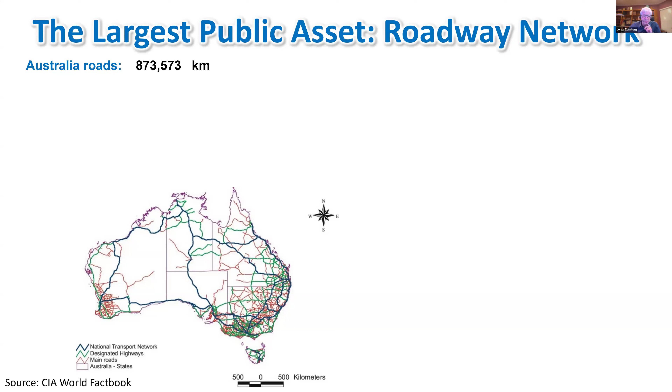As a reference, we have 873,000 kilometers of roadways in Australia. It's hard to put our head around what almost 900,000 kilometers really means. As a reference, the circumference of the Earth around the equator is only 40,000 kilometers. So if we took all the roads in Australia and wrapped them around the equator, we would go around once, twice, 3 times, 5 times, 20 times, 22 times around the equator just with the roadways in Australia. It's a lot.

And we need to build them. We need to maintain them. We need to operate them. As a reference as well, the US roadway network is over 6 million, almost 7 million kilometers. So we would need to go 170 times around the equator with US roads.

If we go to the world, and I want you to remember this number, 64 million kilometers, we would need to go 1,600 times around the equator with our roads just to have a sense of what we mean by the roadway network.

We're not going to get too much into design, but I want to tell you how geosynthetics will help designers obtain a better performance on our roadways. Just as a reference, the typical geosynthetics that we would use in roadways are going to be geotextiles, woven, non-woven geotextiles, or geogrids, uniaxial, biaxial, multi-axial, different polymers, geocells.

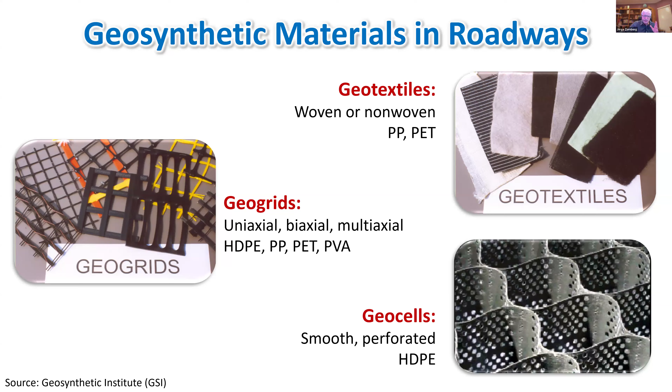Now, when it comes in this presentation, roadways is a lot of things. It's embankments, it's bridges. But in this particular presentation, I am only going to focus on the structural package of a roadway, something like this. So going from the top down, I'm going to specifically focus on flexible pavements, that is, pavements in which we do have an asphaltic layer as road at the very surface.

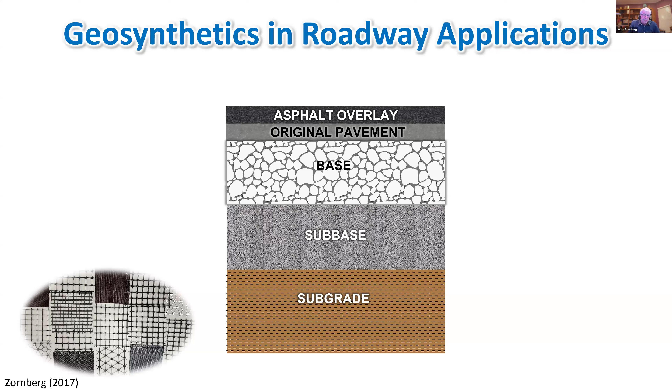So where do geosynthetics go in this structural package in the roadway? This is a complicated thing, because we can use geosynthetics in way too many forms and different types, functions, and applications. So a little bit of what I'm going to try to do for you here is to tell you where we use them. Specifically, I'm going to cover 6 different applications.

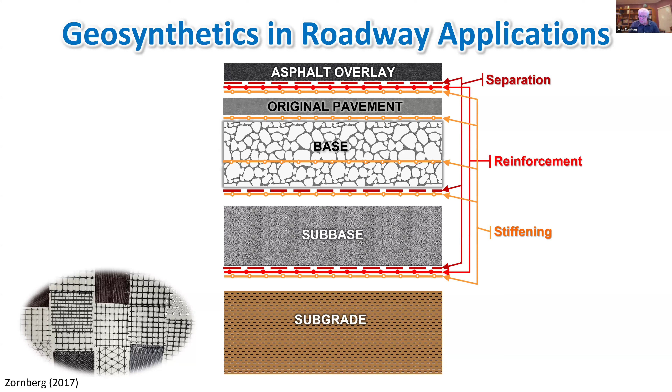Essentially, when it comes to the structural package, we can use geosynthetics for some form of mechanical functions: separation, if we want to keep dissimilar materials separate, or reinforcement, if we want to develop tensile forces to provide stability, or stiffening. It's a cousin of reinforcement, but in this case our goal is to develop tensile forces to improve the modulus. When we design a roadway, the modulus, the stiffness of the system, is particularly relevant at low displacements. But we also can have hydraulic functions, in this case filter, or as a barrier, or as in-plane drainage.

Okay, so we have all these many functions in which we can make good use of geosynthetics, specifically in roadways. So what I'm going to be talking about, I'm going to step back. I'm a professor at the University of Texas at Austin.

So when I teach students about design, about infrastructure, typically we focus too much and almost exclusively on performance: how to design so that our system, our roadway in this case, achieves a certain behavior. And of course, that's the part of engineering that we need to teach.

The one aspect that happens is that when my students go out to the real world, and they say, okay, now I'm going to design for performance, so everyone is going to choose the roadway or the wall or the cover system or the barrier system that performs the best. And that's not how the world works.

Essentially, the way that it works is that for a given performance that is required for certain design criteria, very often the choice is going to be to select what is the alternative. We typically have, as designers, more than one alternative to design the same thing. Out of the different alternatives, very often my students end up choosing the one with the lowest cost.

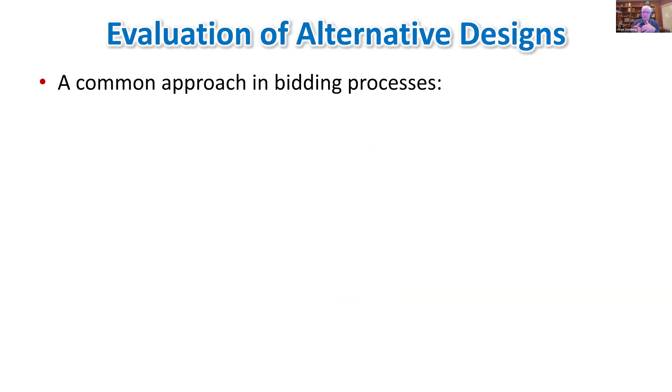And the idea is that each alternative may behave differently. Each alternative may have a different cost, and I'm going to talk about a third important factor, not performance, not cost, but sustainability.

The idea is then, when we are going to get into evaluating alternatives in the US, and I suspect that that's also the case in Australia, the most common approach from the construction management point of view is design, bid, build. And that is very prone to choose the lowest cost alternative. However, it has been known, and it is well known, that really what we want for a given alternative is...

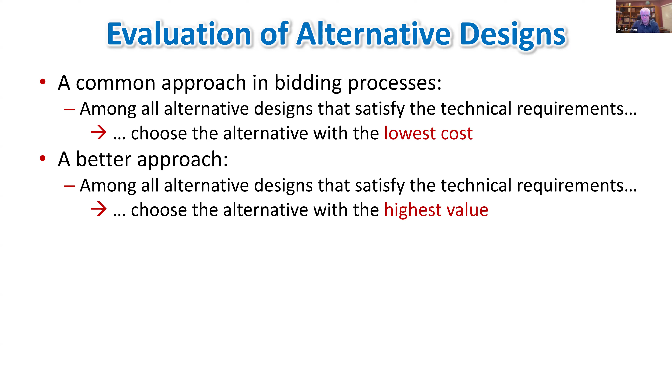not necessarily to choose the lowest cost, even though cost is very important, but we want to choose the alternative that has the highest value. And the reason that I'm telling you this is because I think that when we start talking about the best value of our engineering solution, it is a particularly good framework in which we can start taking into consideration sustainability.

So essentially, this actual framework is called value engineering. And the idea is that out of the different alternatives, we're going to be able to increase the value of our alternative, not strictly by decreasing the cost.

We can increase the value by improving the performance, or by decreasing the cost, or I'm going to toss at you another factor: by increasing the sustainability of our solution. This is very important, and worldwide we're starting to learn how to handle this additional important factor.

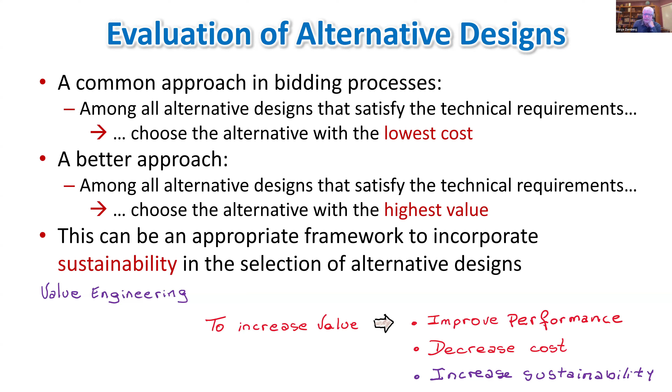There are many different ways in which we can quantify sustainability or the problems that worldwide we're facing regarding weather and global warming, and many different ways to quantify how we're doing. Let me tell you one that I like seeing, one that I'm going to contend with you is relevant.

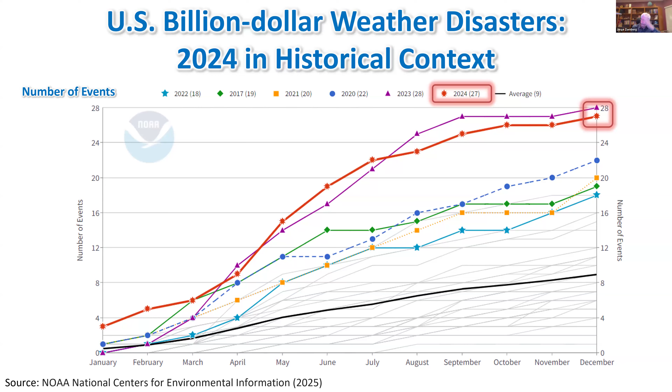And also we have 2021, and we also have 2020. So essentially, out of the six years with the highest number of billion-dollar disasters, the last five years are among those six. We are getting worse. There are many different indicators, and this is just one of them.

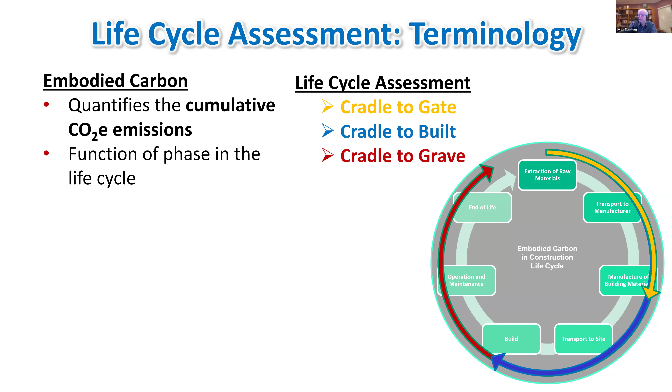The ideal one, but it's hard to quantify, is what is the embodied carbon emissions not at the time that we build it, but at the end of the design life - cradle to grave. If we compare that, we do the most rigorous and most important comparison, which we can't always do with cradle to gate.

In this presentation, I'm going to walk you through examples. Some of them are going to be cradle to built. Some of them are going to be cradle to grave.

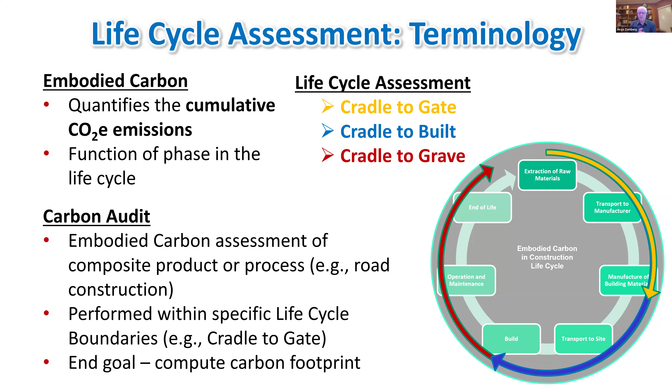So essentially, with the carbon audit for a given life cycle, we are going to calculate what are the different contributors of carbon. That is the background on sustainability and the type of exercise we're going to go through.

In this particular presentation, I'm going to walk you through 6 different projects, all of them on roadways, all with a different application in roadways. I will need to go quickly, but I'm going to walk you through example number one. And what is important about these 6 examples? All of them are real.

All of them are cases where the designer came up with at least 2 alternatives, one with geosynthetics, the other without geosynthetics. These are comparatively old examples; they have already been built. So the decision-making process was based on performance or, most likely, cost. No one paid attention to sustainability, even though from now on we can take sustainability into consideration when choosing the alternative. But for the 6 alternatives I'm going to tell you about, essentially the main criterion to choose among them, all satisfying given performance criteria, was cost.

Nonetheless, we're going to do a carbon audit for each one of these 6 projects, each with 2 alternatives, with and without geosynthetics. And we're going to see what the audit tells us. What are those 6 projects?

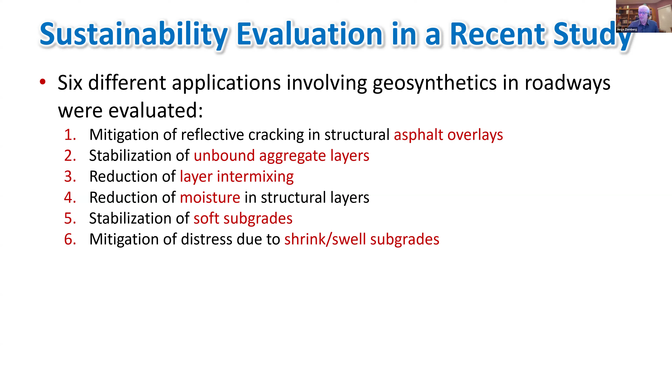Six different applications. One, mitigation of reflective cracking in structural asphalt overlays. I'm going to walk you through this, and if you're not familiar with roadway design, I'll come back to each one. Second, stabilization of unbound aggregate layers. Third, reduction of layer intermixing. Fourth, reduction of moisture, very important in roadways even though we typically don't design for it as much as we should. Fifth, stabilization of soft subgrades. Sixth, mitigation of distress due to expansive clays, a big problem in Australia and in Texas, which is where I live.

So for each application, this is what I just told you. For each one of these six applications, case histories were identified. These case histories have at least two alternatives with and without geosynthetics. We're going to go through the exercise of doing the carbon audit of each one of these alternatives and see what we can find out.

So the sustainability is going to be based on the carbon audit, and the way we're going to calculate this is in tons of CO2 per lane per kilometer. That's how we're going to quantify it. Just as a reference, one ton of CO2 is the carbon dioxide that would be sequestered by 1.5 hectares in a year. It's a lot. Give me 1.5 hectares of forest, and the carbon sequestered in that forest is one ton of CO2.

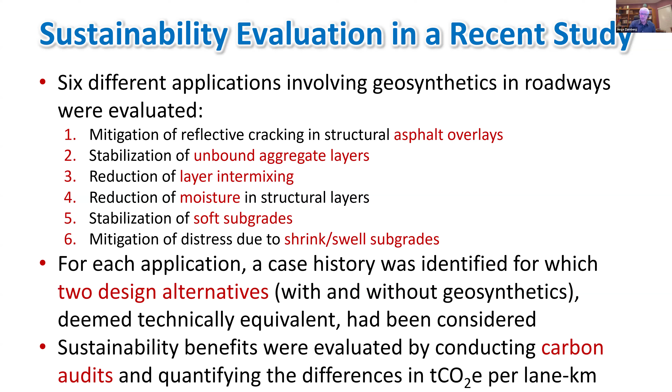This exercise was not just myself, the one that did it. I did it with very, very smart collaborators, and I want to recognize them: Dr. Subramanian, Dr. Rudy, almost Dr. Yalcin, and Dr. Kumar. There is a recent paper that was published with a lot more information about the six case histories that I'm going to walk you through.

All right, so let me walk you through case history number one. The application in this case is mitigation of asphalt reflective cracking. When do we use geosynthetics to mitigate reflective cracking? It turns out that a very problematic phenomenon we have when we do an asphalt overlay, when we replace the superficial layer of asphalt, is what is called reflective cracking. What geosynthetics will help us with is delaying or eliminating this reflective cracking. Let me get back to this.

So this is the problem that we have. We are retrofitting a roadway. Very often what we do is mill, let's say 5 centimeters of the top asphalt layer, and replace it. We're happy because all our pre-existing cracks are now covered with a new, easy to ride surface. But there is a problem. The pre-existing cracks ask a lot from the newly placed asphalt overlay, and we have a stress concentration at the tip of the pre-existing crack, and this is going to be reflected. We're not very happy, because the brand new asphalt overlay, maybe in a year, maybe less, maybe a little more, may reflect the pre-existing cracks.

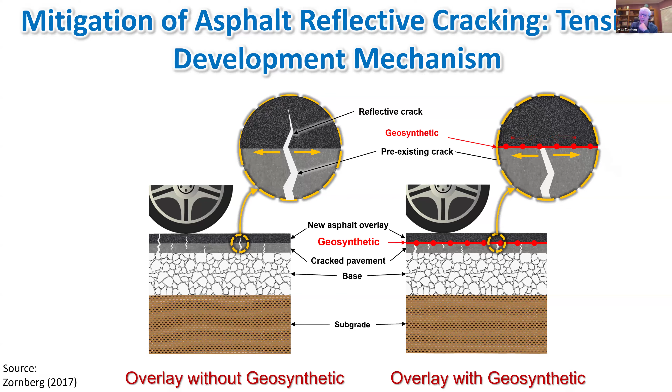There is a different way, that is stress relief. I'm not going to get into the details, but just to tell you there is more than one way geosynthetics can help. If we go for using geosynthetics to distribute the tensions, then the function we need is reinforcement, and perhaps also separation. I didn't tell you about stress relief, but that would be the mechanism or function we'd need there. In some cases these geosynthetics also come with an additional function of barrier, and a very common case would be when we have the barrier and the reinforcement at the same time.

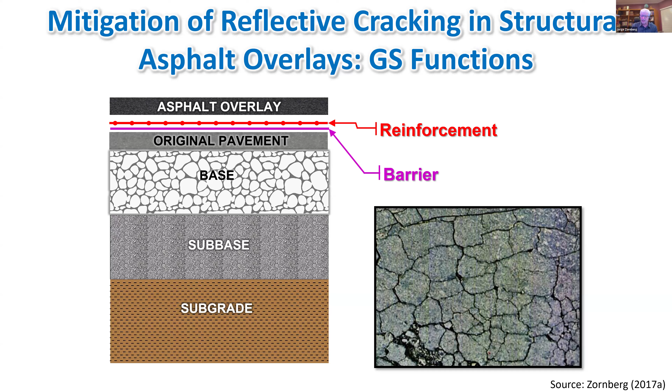So I gave you a very brief overview. I could spend a long time telling you how this works, how to design for it, and how to select the geosynthetics, but I'm not going to do that. Instead, I'm going to walk you through a case history. This case history is in Texas, close nearby Austin, in Bastrop, near Austin, Texas.

And in this particular project, essentially the pre-existing roadway was in distress. And the asphaltic layer was 150 millimeters or so. And the idea was to mill the surface of this asphaltic layer and to replace it.

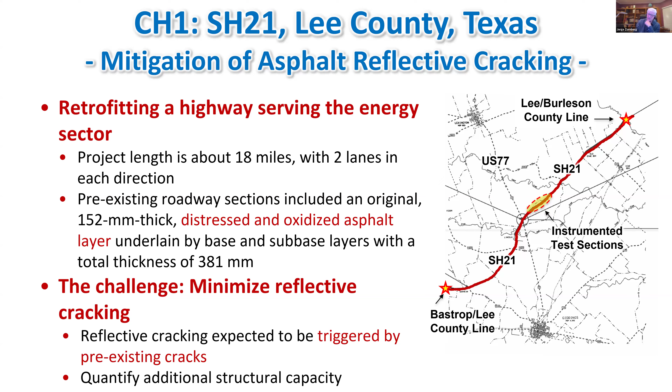One way in which this can be done is by replacing it with a fair amount of asphalt. A different way is to decrease the thickness of the asphaltic layer, but instead to add a geosynthetic that is going to have mainly a reinforcement function. So let me show you the two alternatives. And again, we didn't do these alternatives. These were the alternatives that the designers considered at the time of selecting the final solution.

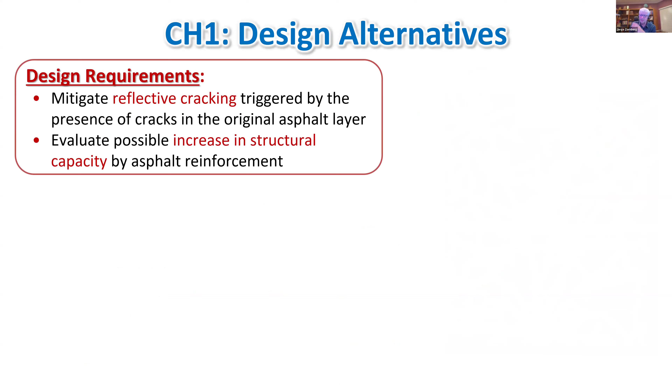So the objective was to mitigate reflective cracking. And potentially, now we're learning that there is also an increased structural capacity, but the primary objective was to mitigate reflective cracking. So this is the conventional design. The original asphalt layer will remain in place, and it would be replaced with 5 inches of new asphalt overlay. Asphalt carries, just so you know, a significant carbon footprint. So if we can decrease the mass of asphalt, we're going to be decreasing the carbon footprint.

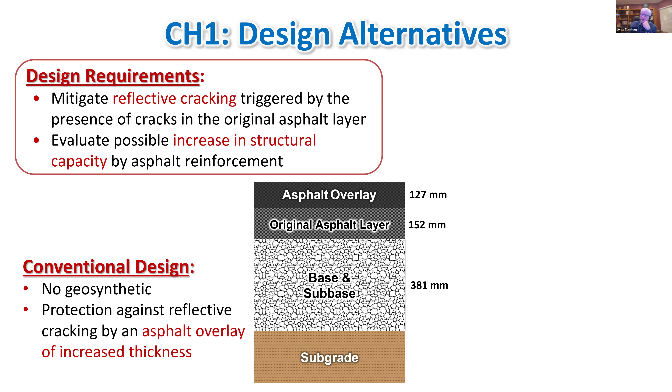So this is the alternative. Instead of having 5 inches or 125 millimeters of asphalt, what about if we have 3 inches, 75 or so millimeters of asphalt with a geogrid? I'm not going to walk you through the details of this particular project, but essentially the exercise involves, from the moment that each one of the different materials of these two alternatives is created, is transported, and is constructed, we're going to do a carbon audit for the as-built solution.

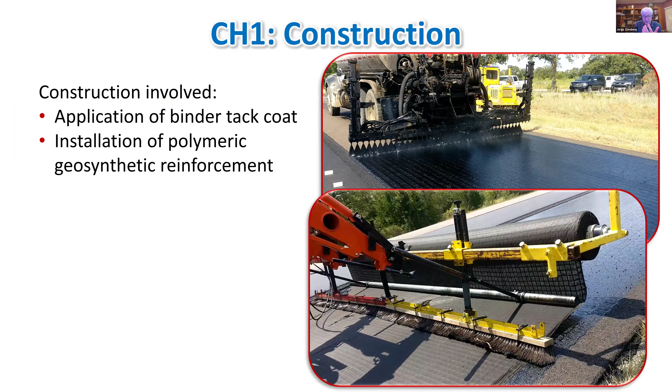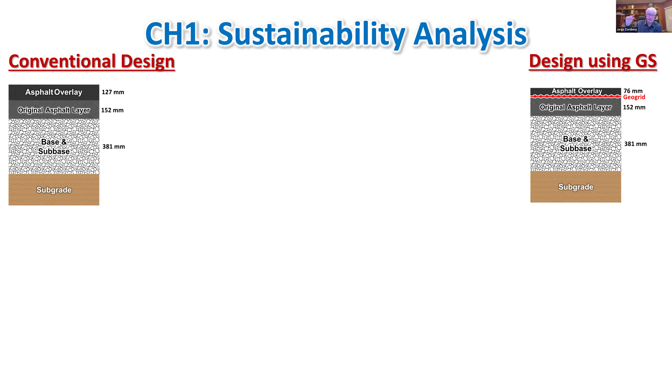So this is the construction. It involved milling, it involved placing a binder tack coat, it involved placing the geosynthetic, it involved constructing the HMA, the hot mix asphaltic overlay. So these are the two alternatives. Again, conventional without geosynthetics. With geosynthetics, yes, we do have an extra geosynthetic that we need to account for, but this came in lieu of 2 inches of asphalt, 50 millimeters of asphalt.

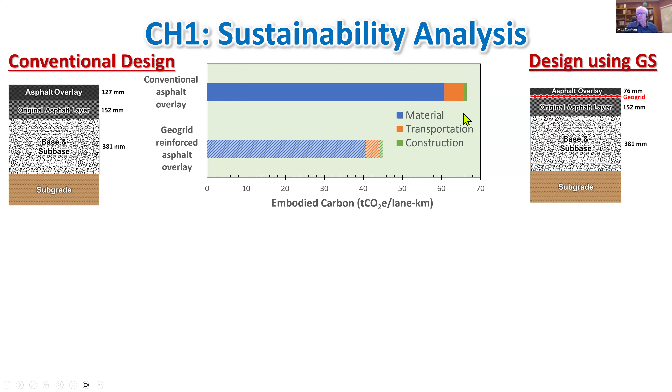So if we can do the carbon audit, and here what I'm going to show you is a carbon audit as quantified in tons of embodied carbon per lane kilometer. So per lane, per kilometer, in this particular case, there are 4 lanes, but per lane, one of the 4 lanes per kilometer. The project was quite long, but in one lane, in 1 kilometer, this is a quantification of the carbon audit. Without geosynthetics, we have a component, and most important component, blue, is material and transportation and construction. Here is almost 70 tons per lane kilometer. And when we calculate the embodied carbon of the geosynthetic solution, we are on the order of 45.

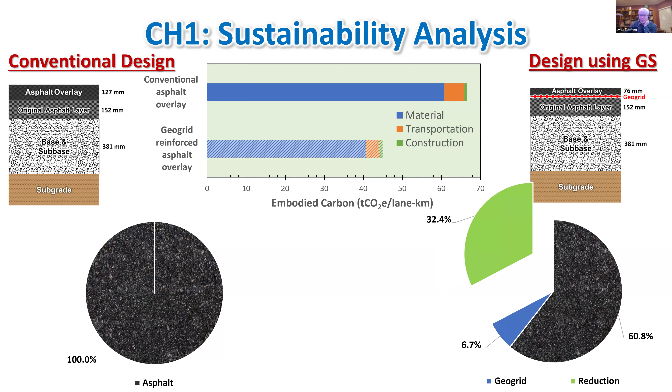This is a different way of looking at it. In this case, per material only, 100% in the conventional solution is the embodied carbon for the creation of the asphaltic layer, transportation of the asphaltic layer, and placement of the asphaltic layer. When we go to the geosynthetic solution, we have a comparison. If this is 100%, then we have less asphalt, a geosynthetic layer, a geogrid in this particular case, and a significantly smaller, 32% smaller. And I want you to look not only at the percentage, because the percentage of the total carbon may be a little bit deceiving. I want you to think of 22 tons of embodied carbon per lane kilometer. This is what this geosynthetic solution could save if, instead of going for the conventional solution, we go for the geosynthetic solution. Let me take you to case history number 2.

In this case, it's going to be a different objective. The objective will be to increase the modulus of the base layer. When we design a roadway, our base, our aggregate layer, what we do ask from this aggregate layer is to increase the modulus. It needs to have a good modulus. It needs to be stiff. What the geosynthetics will do, if we stabilize it with geosynthetics, is to increase that modulus. This has implication, for example, in decreasing the thickness of the unbound aggregate layer that is required for a given design life. A different way of looking at this is that for a given aggregate thickness, it will increase the design life. How does it work?

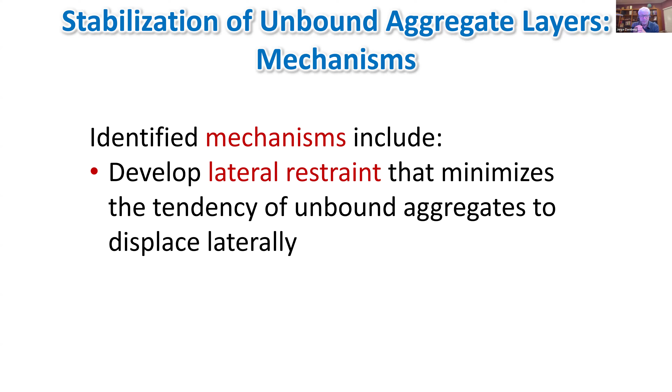There's an entire discussion on how the geosynthetic would improve the performance of the unbound aggregate. At this point, I'm going to tell you there was a lot of discussion about these different mechanisms that were proposed. There is consensus now. The consensus is that the mechanism is called lateral restraint. Let me tell you what lateral restraint means.

When we construct the road, we compact this aggregate. So as soon as it's constructed, we have a highly compacted, very dense and confined aggregate layer.

The alternative is that the geosynthetic that we place in here will minimize or prevent this lateral movement. And by doing so, we're going to maintain—some could argue even increase—the modulus of our unbound aggregate layer.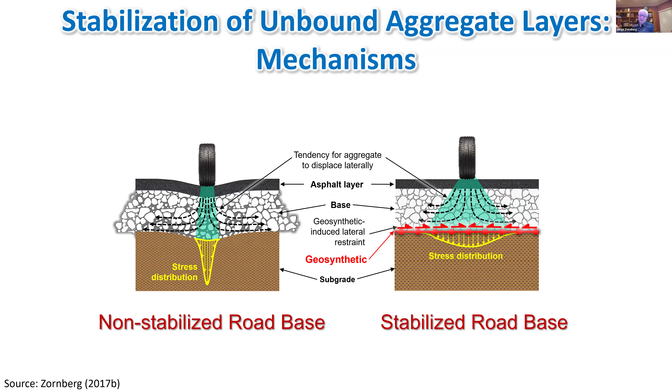Okay, so only now that we understood, and it's not trivial how we come up with this mechanism—only now that we understood the mechanism can we tap into what is the geosynthetic's role. We need the mechanisms, then we need the property, the functions. Only once we know the functions can we go to the properties. What is the function that in this particular case we need? The function is called stiffening.

The idea is that the selection of this geosynthetic is to maintain the confinement, to lead to an increased modulus in relation to the one that we would have if this geosynthetic were not in place.

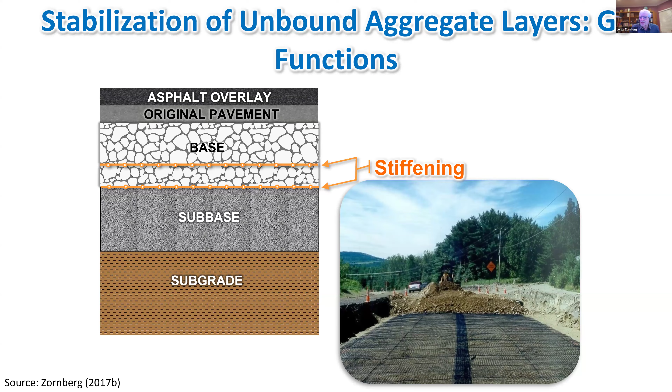Let me take you to a project. The project is in Ohio, near the Great Lakes, and is a reconstruction of Interstate Highway 90. This project involved a very challenging effect. This is right next to Lake Erie, and in the Great Lakes there is a problem called the lake effect snow.

Essentially, when we have very low temperatures and the wind comes on top of Lake Erie, it collects moisture because the lake is comparatively warmer. It collects moisture, but as soon as the wind, now carrying moisture, reaches shore again, it's cold again, and essentially we create a snow effect just from the moisture in the air. I'm explaining this because a very important condition in this project was that it needed to be constructed quickly.

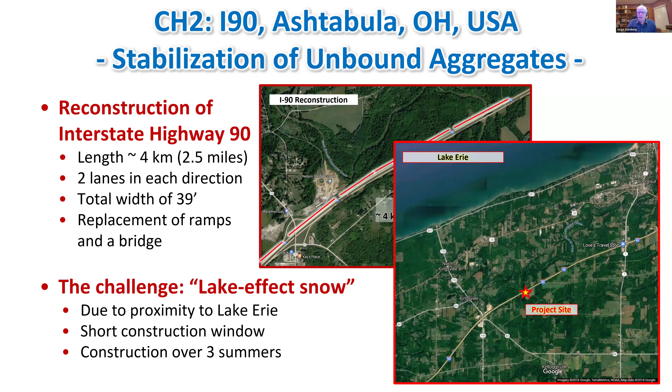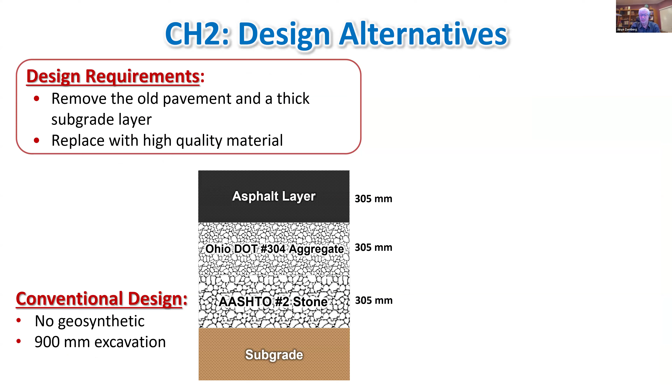Let me show you the two alternatives. Alternative number one, and all this was constructed below grade—these different layers of aggregate, from the existing surface grade down. It required an excavation to place, in this case, AASHTO number 2 stone, Ohio DOT number 304 aggregate. These are different types of aggregate materials, and finally the asphaltic layer.

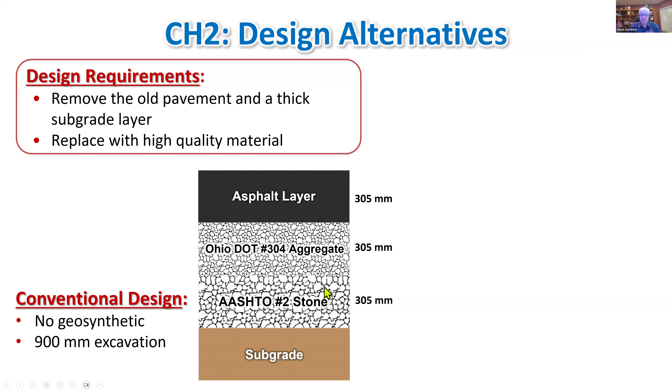If we benefit from the stiffening, from the stabilization of these unbound aggregates, the designers came up with an equivalent system from the performance point of view. This is the equivalent system: let's excavate less, let's still keep two layers of aggregate, but thinner layers. So these are the two alternatives—one, more excavation, more aggregate; the other, less excavation, less aggregate, plus a geogrid.

We evaluate performance—the designers did that. We evaluate cost—I'm pretty sure this was selected because it was more cost effective. But what we're going to do now, after the fact, is evaluate the carbon footprint.

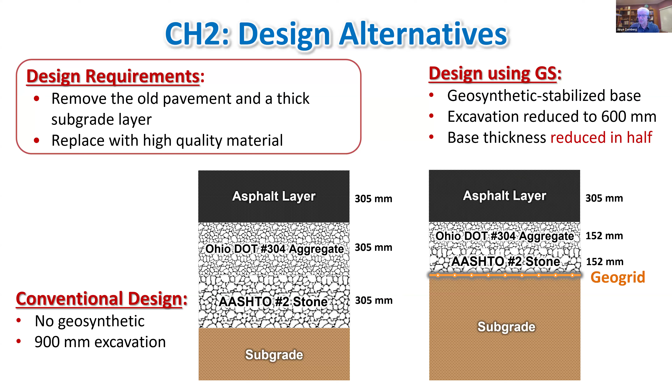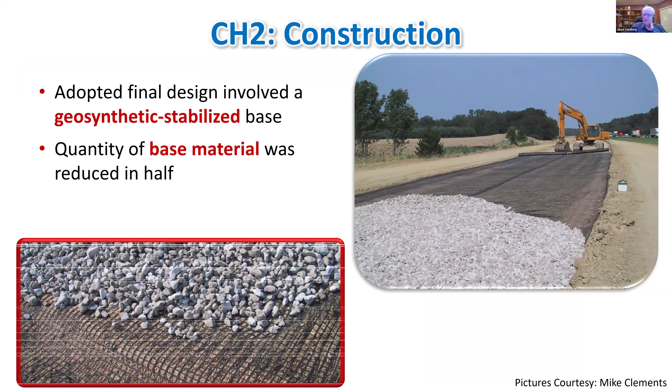This is the construction of a stabilized unbound aggregate layer. Here's the placement of the geogrid, and in this particular case, the unbound aggregate thickness was reduced. Here's a view of the geosynthetic with the unbound aggregate, and here's the compaction.

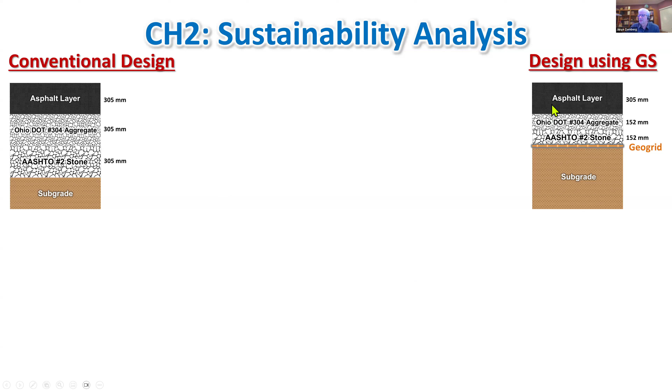So this is the exercise for today. There's a lot we could talk about regarding the design, the mechanisms, and the selection process, but in this case the focus is on doing an audit of these two alternatives—a sustainability audit, a carbon footprint audit, comparing the conventional design with the alternative design using geosynthetics. These are the results.

In my opinion, if we were to do this today, probably we would try to achieve the same performance but with a thinner asphaltic layer, because that will have a significant component in the carbon footprint.

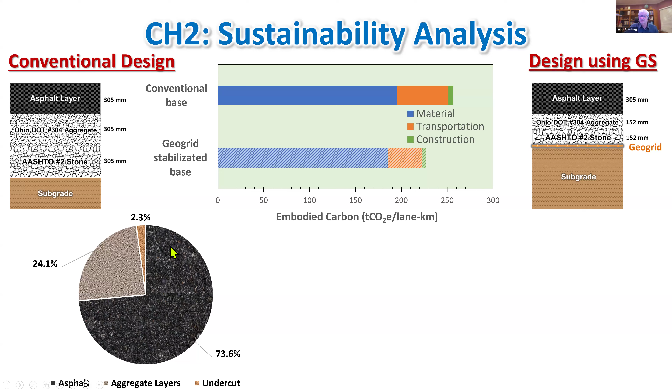This is the same audit, but shown in a different way as a pie chart, but in this case per material: asphaltic layer, aggregate layers, the cost of the undercut, and the geosynthetic layer.

It's an 11% decrease in relation to the conventional aggregate, but look at the magnitude of the tons of CO2 per lane kilometer. It's even higher than the previous example, even though as a percentage it's smaller. Over 30 tons of carbon footprint of CO2 equivalent is a lot.

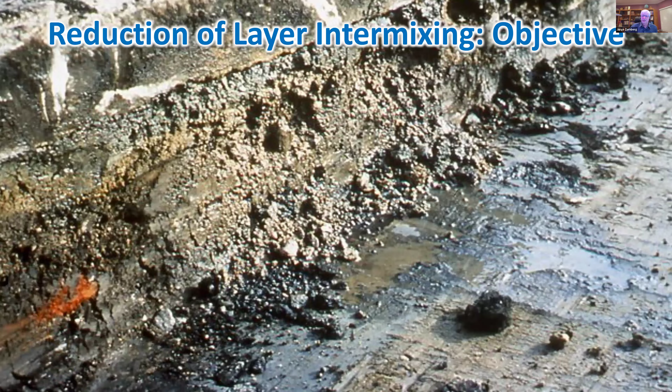Let me walk you through our third example, and I'm going to pay attention to my timeline. Maybe I'm going to rush through some of the examples. This is layer intermixing. In this particular case, we want to avoid contamination of unbound aggregate layers with fine-grained subgrade. This is what we're talking about.

We have a subgrade that is essentially a clay subgrade, and we put it in contact with our very expensive and very good base layer. What we do not pay attention to in design, but it happens, is that over time we will have an intermixing of those two materials.

There are two mechanisms: either we lose some of the aggregate particles, some of the gravel particles, into the subgrade—there's some sort of localized bearing capacity problem—or maybe because we pump up. If there is water, we will pump up the fines into the base layer.

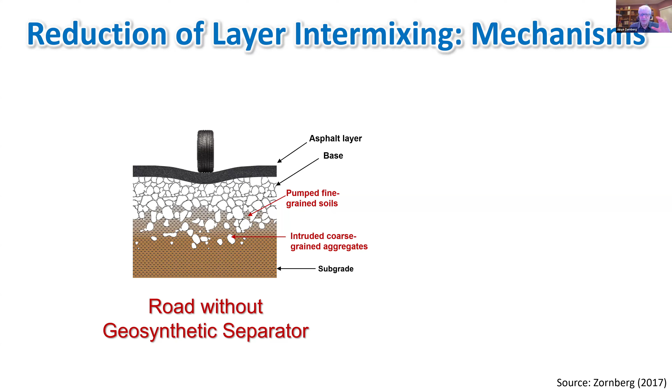Either way, for all practical purposes, this base—which we designed for a given thickness—we lose that base over time. This solution is very, very simple.

Let's get a comparatively inexpensive geosynthetic, sometimes just a non-woven geotextile, maybe a woven geotextile, and let's keep the aggregate and the subgrade separate. In doing so, we're going to maintain the integrity of the base layer that we want so much to perform, because of its stiffness.

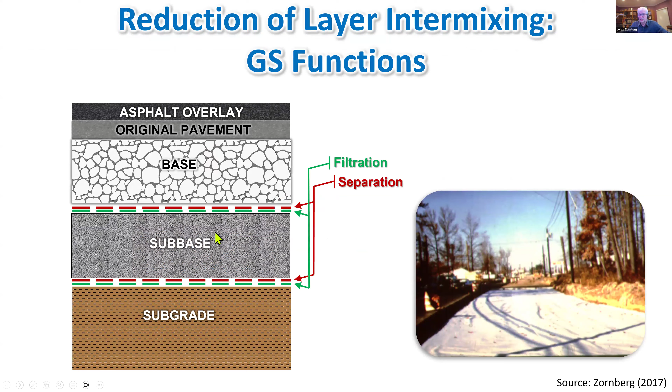So only now that we have this mechanism can we come up with what the functions are. The function is going to be separation, typically between the subgrade and the subbase, if we do not have a subbase with the base. But very often we're going to have water, so the hydraulic functions such as filtration are going to be particularly relevant.

I'm going to walk you through a case history. The advantage of this case history—and I'm not going to have that much time to show you—is that unlike the previous two examples, in which I walked you through an audit from cradle to as-built, here I'm going to take you from cradle, passing the as-built, into the grave.

So I'm going to do the carbon audit up to the end of the design life of the roadway. It's not every structure that we can do this. In this particular case, this was a monitored structure, so we have the data to do this analysis. It was an experimental section, so that's why we have so much data.

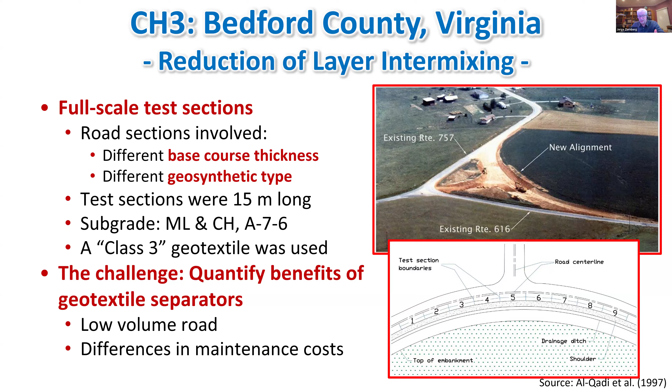But the challenge is to quantify—and this is a very big challenge. We know that geotextiles work well as separators, but collecting the data is tedious, time-consuming, and difficult to get. This is the two solutions. Again, we're going to compare this at the end of the design life, not as constructed.

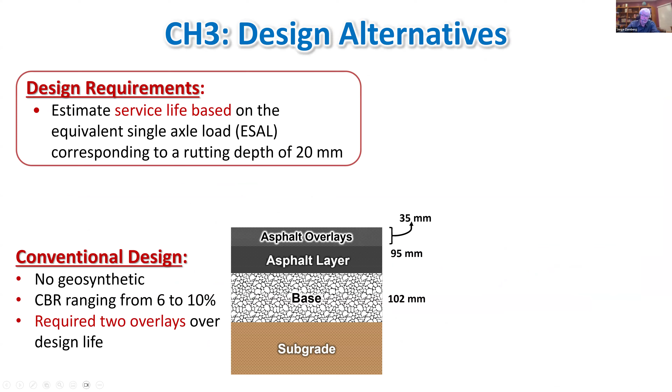So what ended up happening is that the conventional design without geosynthetic, to get to the end of the design life of the next solution I'm going to show you, is this one: same thickness of the asphaltic layer, same thickness of the base layer, plus a geotextile.

So where's the savings? Well, the savings is that by the end of the design life of the alternative that we designed with a geosynthetic, we reached the design life. The design life in this particular case was reaching a rutting depth, a vertical displacement of 20 millimeters. That's the end of the design life.

To reach the end of the design life in the alternative with geosynthetic, we had to reach the same design life, but after retrofitting the asphaltic layer in the conventional design. In order to reach the same time, the conventional section had to go through the milling and asphalt overlay process twice, while the geosynthetic alternative only had to do it once. So the top 35 millimeters had to be milled and replaced twice for the conventional design.

Twice that we have 35 millimeters means twice the transportation, materials, and placement costs, and embodied carbon.

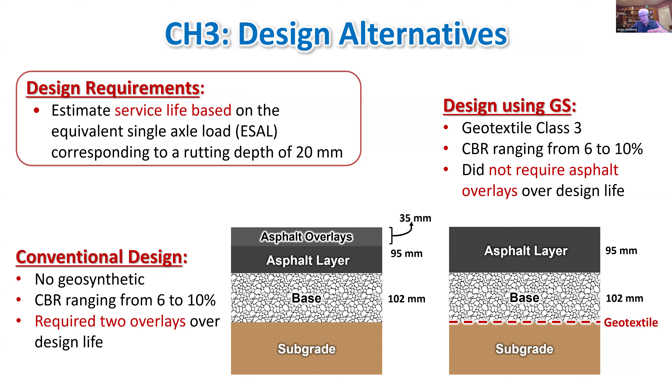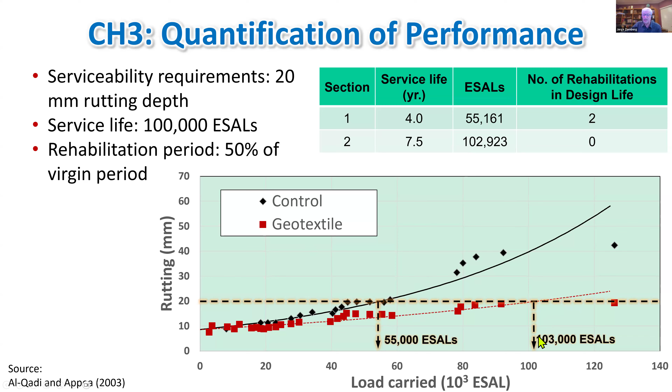This is the hard-to-get data: rutting depth versus load, number of cycles, where number of cycles is equivalent to time. The design criterion was a rutting depth of 20 millimeters. This is measured in number of cycles of a standard wheel load: 55,000 cycles for the control section without geosynthetics, versus 103,000 cycles for the section with geosynthetic — a significantly longer design life. Consequently, the control section had to go through retrofitting, not reconstruction, twice to reach give or take 100,000 cycles.

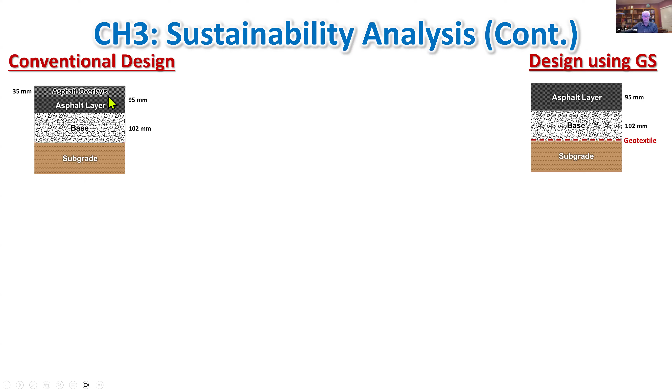So here we have the two alternatives again: the conventional design, same thicknesses, but in this case with asphalt overlay reconstruction. And here are the comparisons.

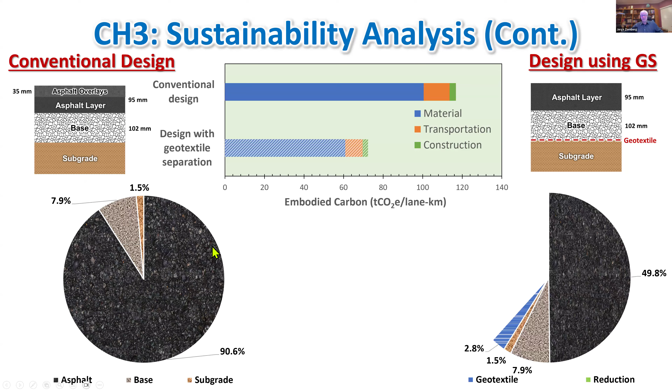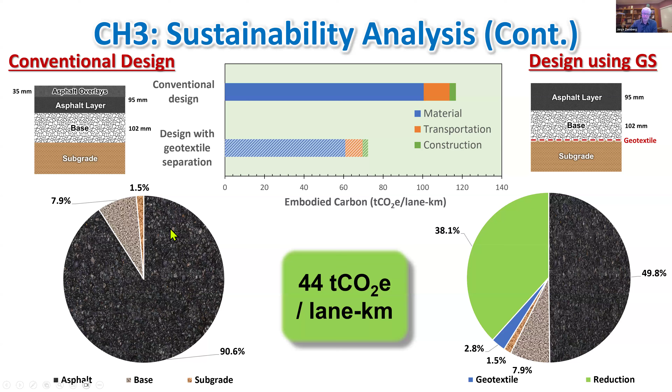If we look at this comparison again, we have the contribution from the asphaltic layer, the base, and the subgrade. With geosynthetic, this pie chart shows a savings of 38% of the carbon footprint using the conventional design as reference — that's huge, 44 tons of equivalent carbon per lane per kilometer.

I don't want to take more time than what you planned for — for me it's 6:50. So I'm going to walk you through three case histories. I have three more, but I'm not going to show them to you. I'll just tell you the final results and owe you the detailed information, because I want to get to the end.

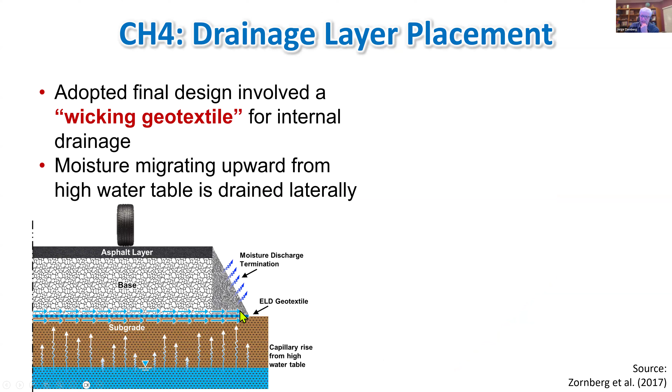This next case history addresses mitigating drainage — the benefit of having in-plane drainage, enhanced with a new type of geosynthetic called the wicking geotextile. In this particular case, this was done in lieu of using a very special granular material that could serve as a drainage aggregate. I'm not going to show you this one, but this is case history number 4.

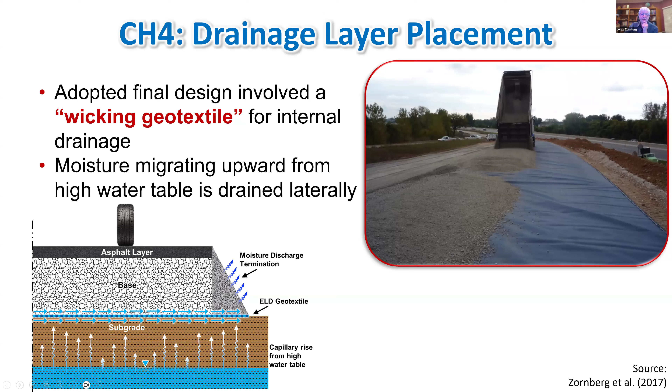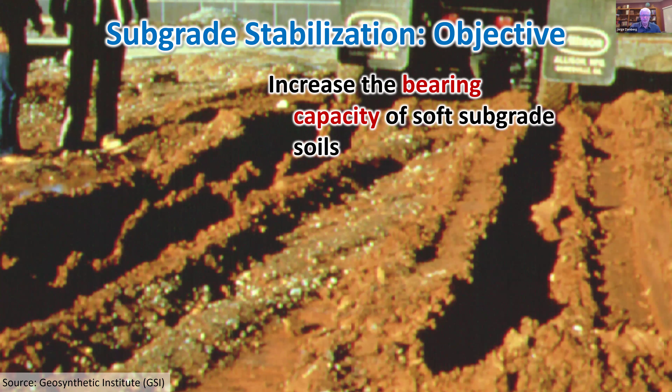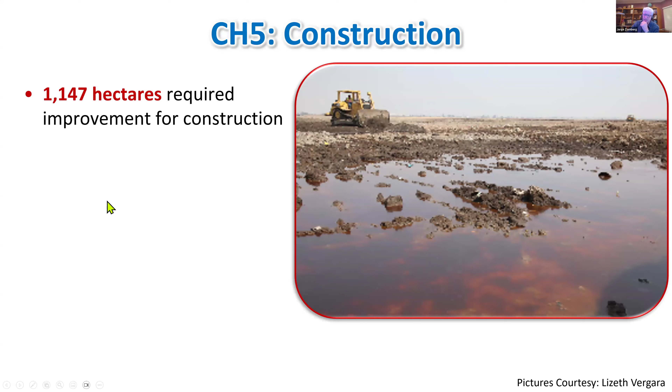Case history number 5 is about what happens if we have a problem with our subgrade. In this case, it's a different problem — one in which we use a reinforcement, a geotextile or a geogrid, but the objective is to increase the bearing capacity of a soft subgrade. I owe you how to do it, but I'll walk you through this very interesting case history: the construction of the new international airport in Mexico City. This is only one fraction of that humongous project, involving a large working area. I'll owe you the full case history — it's in the paper I mentioned — but in this case, the solution was using a geogrid and a geotextile separator at the interface between the subgrade and the base.

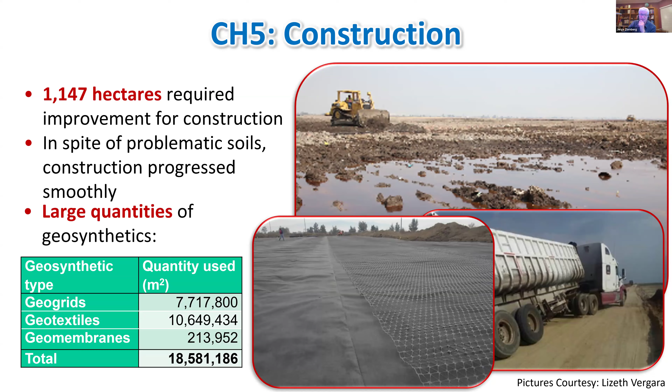The case I'm not going to show you, but was planning to, is case history number 6. This one is also very interesting because in this case we have data to walk you through the audit at the end of the design life.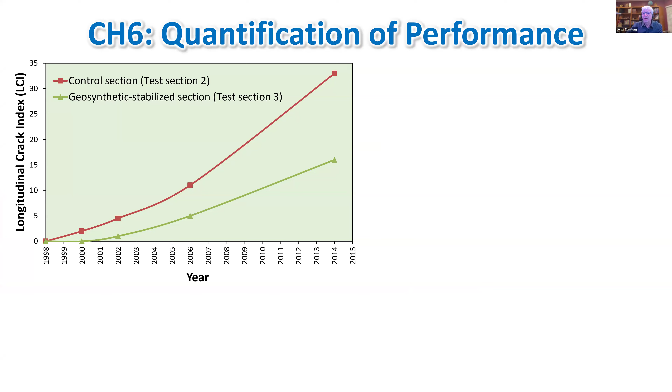In this particular case, the design criterion for the sections with and without the geosynthetic was a longitudinal crack index of 15%. That means developing a longitudinal crack that is 15% of the length of your section. How long does it take? In the control section without geogrids, it could take about 8-9 years, and with geosynthetics it will take over 15 years. The control section had to go through retrofitting with an overlay, so when we compare, we end up with a comparison at the end of the design life, which is cradle to grave.

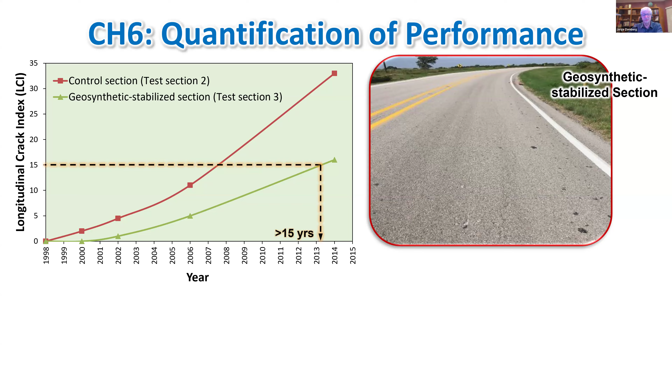So I talked to you about what it means to do a carbon audit. I talked to you about 3 of the applications with 3 case histories in which we have done the audit. I skipped, but I promised you, 3 additional case histories - if you want to go to the reference, the audit is there. So this is a summary.

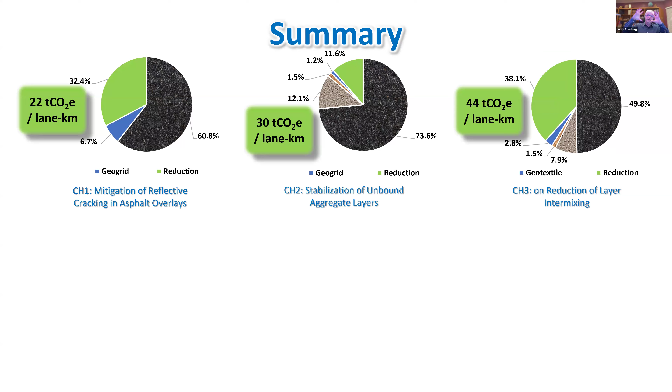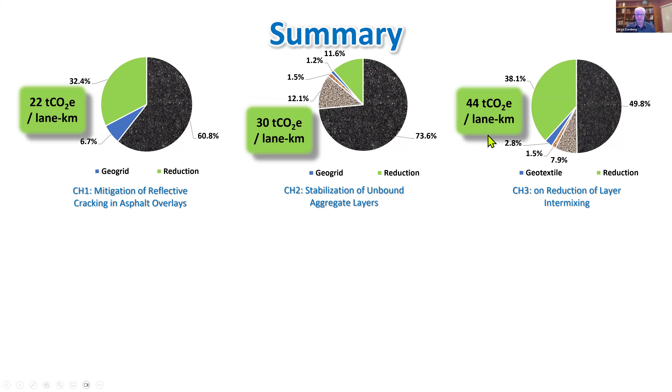In case history number 1, the objective was to mitigate reflective cracking, and we saved 22 tons of equivalent carbon per lane kilometer. In case history number 2, the objective was to rigidize the base, and we saved 30 tons of CO2 equivalent per lane kilometer. In case history number 3, we reduced the mixing by placing a geotextile, and increased the design life of my roadways just by separating the subgrade clay from the base, saving 44 tons of equivalent carbon footprint per lane kilometer. These are the 3 case histories that I didn't show you.

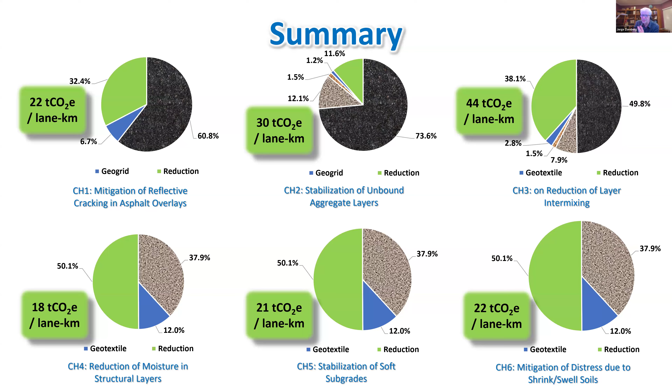Reduction of moisture, we saved 18 tons per lane kilometer. Stabilization of soft subgrade, we saved 21 tons, and mitigation of distress due to the presence of expansive clays, 22 tons of carbon footprint. A lot of savings in carbon footprint, but I want to give you a sense of what this means. So I'm going to walk you through a hypothetical on what it means to save these many tons of equivalent carbon footprint per lane kilometer. Let's do a few calcs. Let's consider the following.

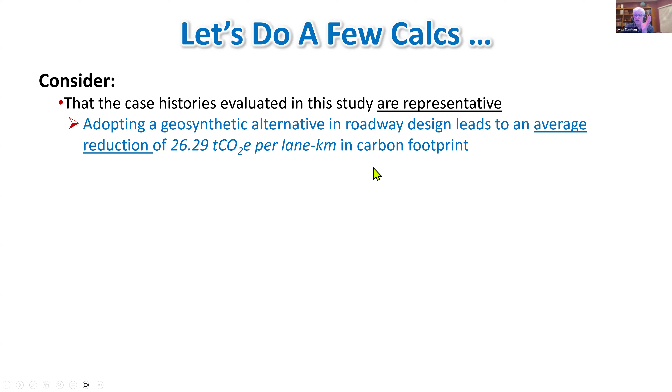Let's consider that these 6 case histories I showed you are representative - 6 different applications of geosynthetics in roadways. Let's say they are representative of the cases of carbon audits we would do in other cases. That's definitely not true, but let's assume they are representative. This means we could argue that as an average of these 6 case histories, weighted by length, we have an average reduction of about 26 tons of carbon footprint equivalent per lane kilometer. This is for the design life after construction.

Let's take a typical design life of 15 years for my roadways. So if we amortize these 26 tons divided by 15 years, instead of the as-built figure, we get on the order of 1.75 tons of equivalent carbon per lane kilometer per year.

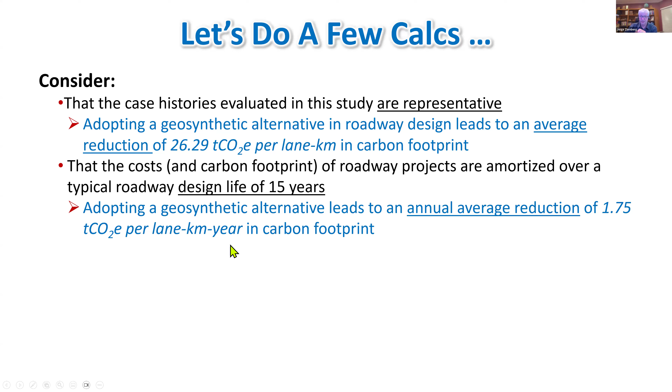Let's do a very, very hypothetical scenario in which - remember I showed you the world road network, which was 64 million kilometers - let's make the very significant assumption that in the future these 64 million kilometers will use geosynthetics one way or the other, that geosynthetics become very common: we have a base, we have a subgrade, we compact the base, we put asphalt, we put a geosynthetic. They become common use in all roadways, using one of the 6 applications we have.

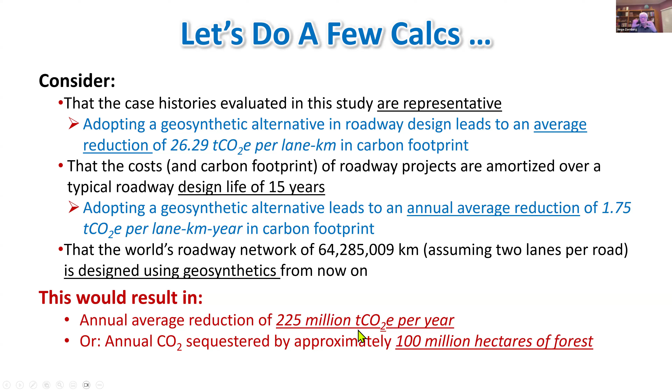So what this would mean for these carbon savings per year if we use geosynthetics, given these big assumptions - that the examples we did are representative, and that all roadways start using geosynthetics - we are saving per year in the world an average reduction of 225 million tons of carbon equivalent per year. This is equivalent to the carbon footprint sequestered by approximately a forest of 100 million hectares in a year.

What is 100 million hectares? I did a little bit of geography. I went to your state, the driest of your states - I learned it is South Australia, and Adelaide is its capital. So essentially, if we were using geosynthetics as part of routine design in roadways, we would be saving on the order of 1.1 times the size of a forest the size of South Australia.

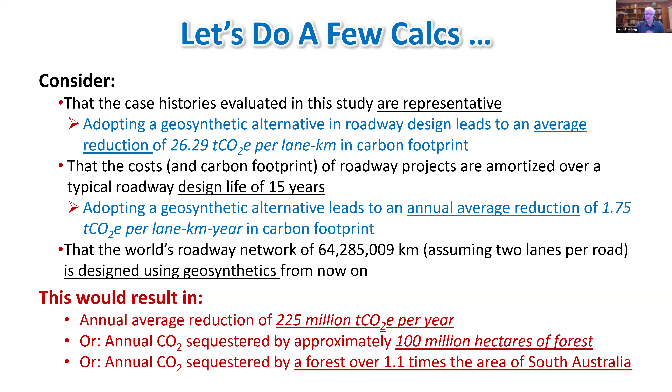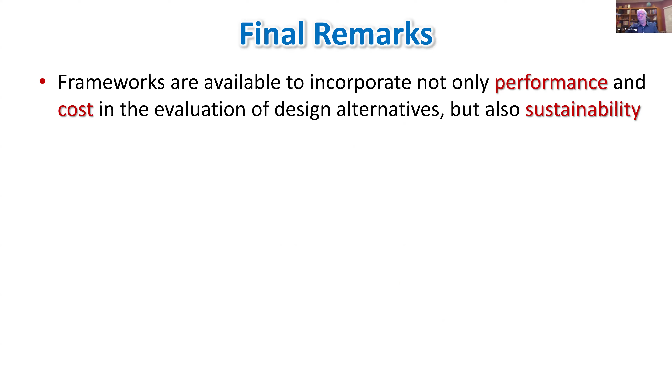Big savings if we end up implementing this as an alternative. Among the different infrastructure assets that we have, if we make a difference in roadway design, we have the opportunity to make a significant impact because of the sheer volume of roads we have worldwide. Conclusions: frameworks now exist to evaluate not only performance and cost, but also sustainability in roadway infrastructure.

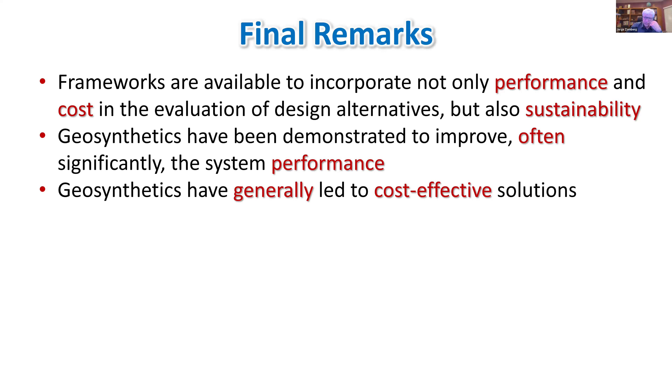Geosynthetics have been demonstrated to improve, often significantly, the performance of roadways. We've focused a lot on how to improve performance using geosynthetics. But we also know that when using geosynthetics in roadways, more often than not, almost always, the solution is also cost effective. And I hope I've convinced you that we're well on our way to demonstrating that the solution with geosynthetics consistently provides a lower carbon footprint.

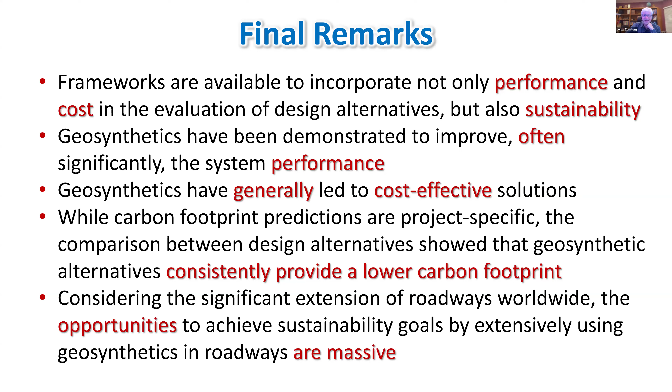Even though my example was hypothetical, the message is that there are significant opportunities to not only use geosynthetics to improve the performance of our roads and the cost of maintaining and constructing them, but also the opportunities to reduce the carbon footprint when using geosynthetics in roadways are simply massive. With that, I thank you so much for your attention.